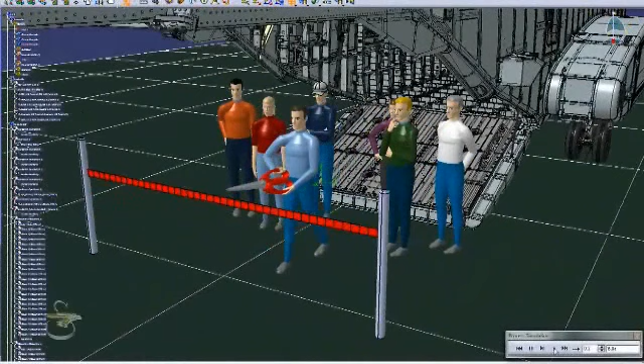Sikorsky Aircraft has officially launched a new virtual reality center for the CH-53K heavy lift helicopter program, taking the manufacturing of the next generation heavy lift helicopter for the United States Marine Corps into a whole new dimension.

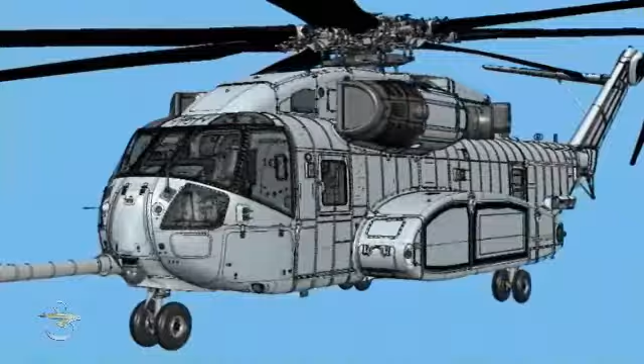Engineering is all about making things and making things better. And when you're engineering helicopters, you've got a lot of things to consider. Due to the size and complexity of the CH-53K helicopter, we had to be creative in adopting its design and development. The Virtual Reality Center is housed within the engineering laboratories at Sikorsky's main manufacturing facility.

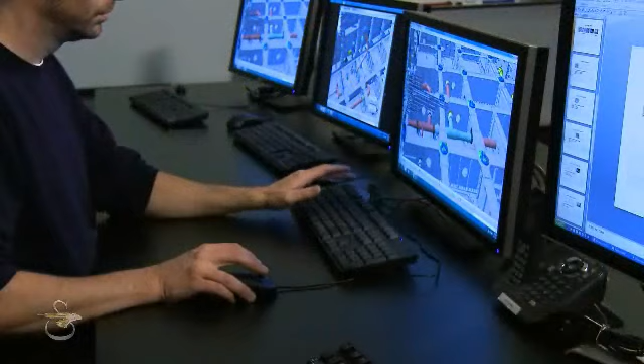12 cameras are strategically placed high along the walls, capturing movements of the operator, who is then immersed into the CH-53K digital environment. Head-mounted displays, sensored gloves, and a force feedback system allow virtual interaction with the aircraft. All data processing and recording takes place at the command center in the back of the room.

Until recently, the work of the engineer was complicated by the limits of the physical world, and the testing and retesting that accompanied that environment was inefficient and costly. Now we can perform installs in this virtual, computerized, three-dimensional environment that allows us to animate the parts to see how they'll fit.

All of this innovative technology comes together in what Sikorsky deems to be perhaps the most complex aircraft development it has ever undertaken. Sikorsky is building the CH-53K heavy lift helicopter under a $3 billion system development and demonstration contract with the United States Marine Corps. The heavy lift mission is critical.

It calls for an aircraft that can stand up to the daily punishment of temperature extremes, high structural loads, and harsh conditions that are associated with shipboard and austere location operations. Developing this large, complex aircraft is no small task.

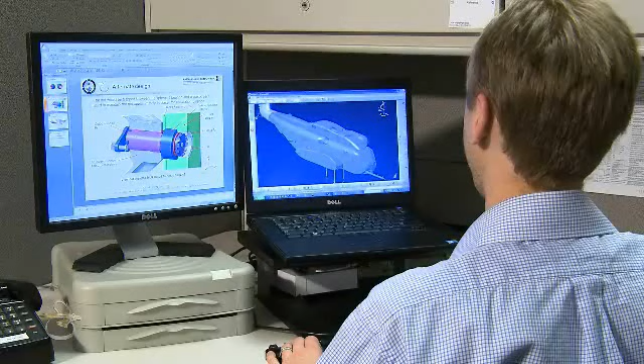The use of a virtual reality center offers tremendous efficiencies, saving time and money in identifying design gaps long before the real components are ever assembled. We're building a helicopter that will have more than 20,000 individually designed parts, all of which have been modeled in a fully 3D digital environment.

Using the aircraft components the designers create with CATIA software, they can now determine whether the parts can be assembled within the required manufacturing clearances that are revealed by a color coding process.

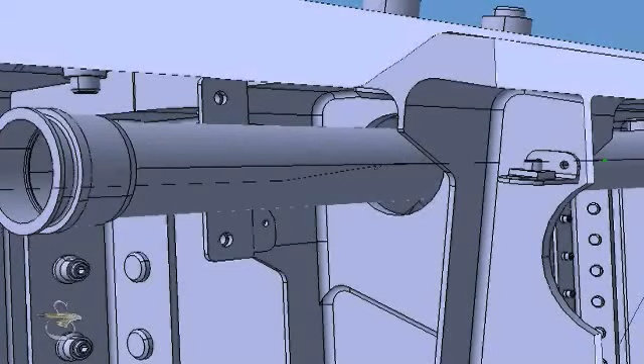We have already yielded design benefits from the new software. We uncovered a handful of fuel lines that required modification because the parts would not fit into the aircraft as originally designed, or would have been damaged upon installation. We've estimated savings of about $18 million for this one event alone.

The efficiency of the Virtual Reality Center will carry over to the maintainer's role, ultimately delivering to the customer a one-of-a-kind machine, the most capable helicopter ever built.